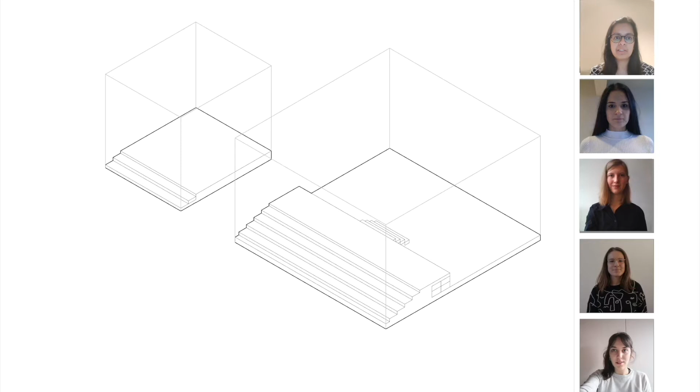Two prototypes of two different sizes are characterized by an elevated floor, a plinth. Several steps extend the interior space to the outside by creating sitting areas in dialogue with the exterior public space.

Flexible furniture is integrated in the room, such as pull-out seating stored under the plinth with the capacity to accommodate up to 70 people. Furthermore, on the back wall of the room, a flexible storage unit is located, and this is called the Tetris wall.

The wall is locked when the furniture is not in use, and it allows for a free usage of the room while training programs are not running. The Tetris wall is conceived in order to allow the most flexible configuration possible. Once closed, the furniture only measures 60 centimeters deep and 5 meters long.

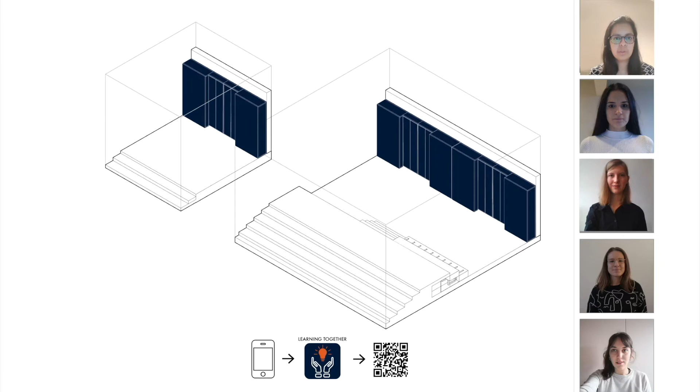Through an app on the phone, the QR code can be scanned to unlock the space. Charges will be registered for each minute of use, and in this way, the responsibility of the furniture is ensured by the users. Maintenance can be done quickly through the app by notification made by a user.

The wall furniture is composed of three parts. In the center are located two cabinets, the wet and technical one. They will provide hot and cold drinkable water, printer, projector, sockets, and other basic tools.

On each side of these two cabinets are located the sliding furniture. These are composed of a cabinet that can be pulled out and moved in the room to be used as a space divider, as well as a storage space or projector surface.

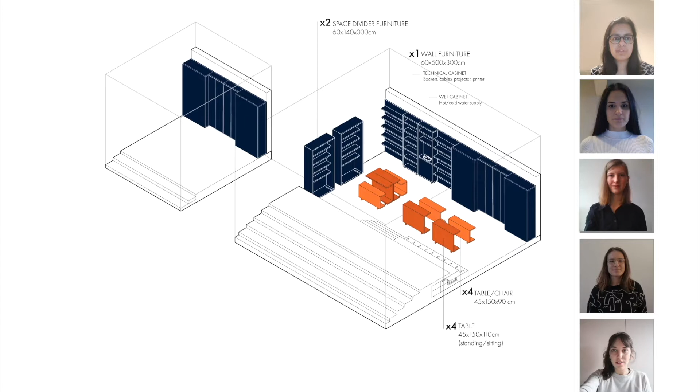Inside are interlocked four tables, 1.5 meters and 0.9 meters high. Used together, they form a complex of sitting and working structures. Turned on the side, they can also be used as sitting areas.

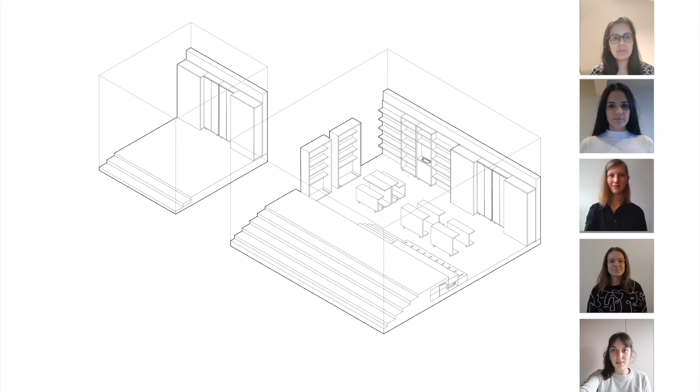An easy closing system for the space is ensured by a metallic curtain, similar to the commercial activities in the area. During the night, the space can be closed and locked, and during the day it can welcome community activities in parallel to the training center.

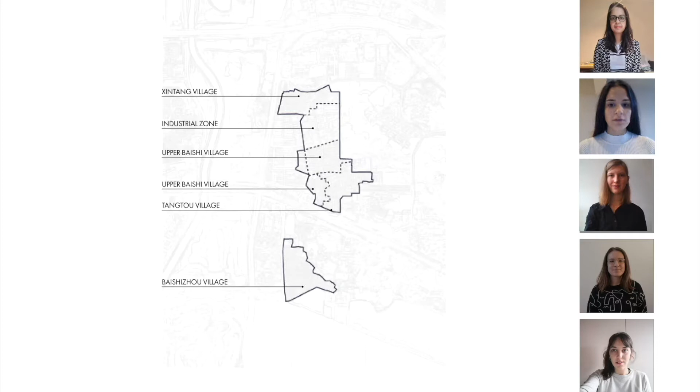Baishizhou urban village is one of the largest in Shenzhen. It's divided into 5 smaller urban villages. We have, on the north, Xintang village, the industrial zone, Upper Baishi village, Tangtou village, and on the south the Baishizhou urban village, which will be the focus of our analysis.

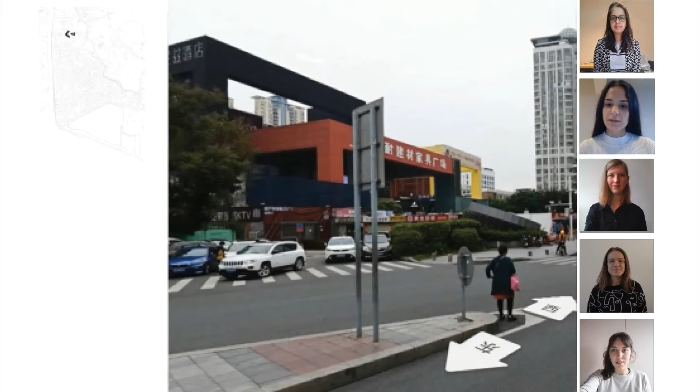It was important to understand the atmosphere and condition of the site, but also what was developed around it, such as the city with its characteristic skyscrapers, shopping centers, as well as the touristic attraction Windows of the World.

Furthermore, a more in-depth analysis was carried out through a mapping exercise in order to develop a more efficient and successful proposal. Commercial activities were mapped out, such as food and restaurants, shops, service shops, offices, and beauty salons.

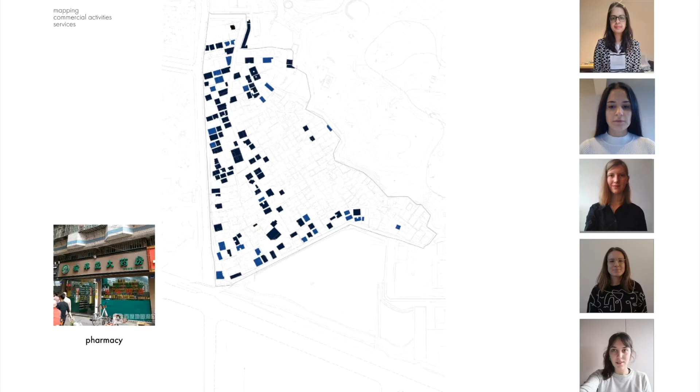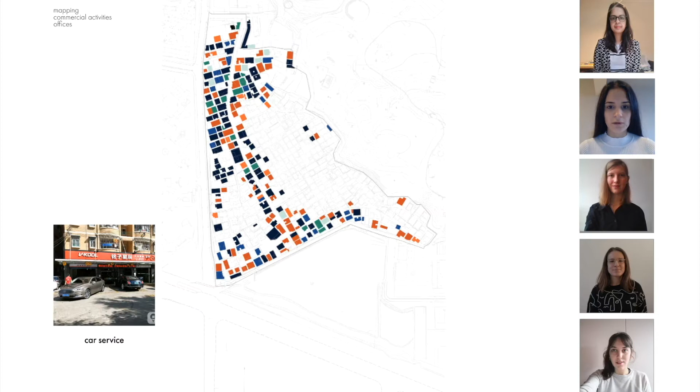From this map it was visible that commercial activities are mainly distributed and located along the main street on the north, center and south, while the east, which is mainly residential, is empty and has fewer commercial activities present. Furthermore, public facilities were also identified, and those, unlike the commercial activities, are not so present.

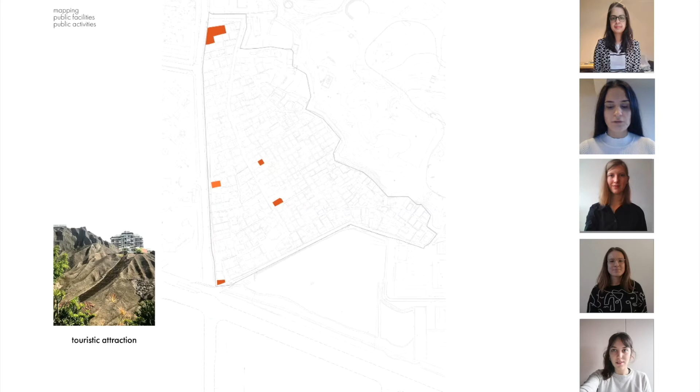There are only a few scattered alongside the site, such as a health center, one educational construction, or service centers.

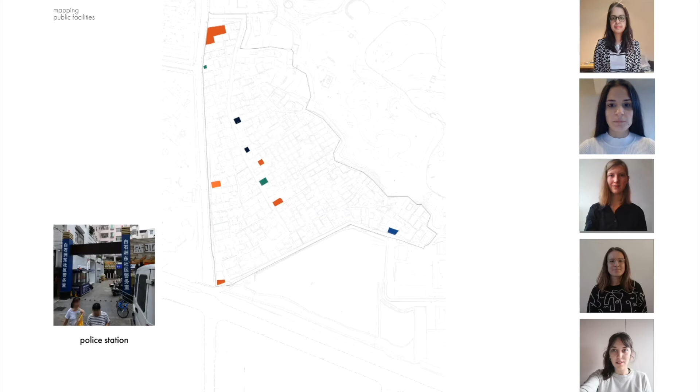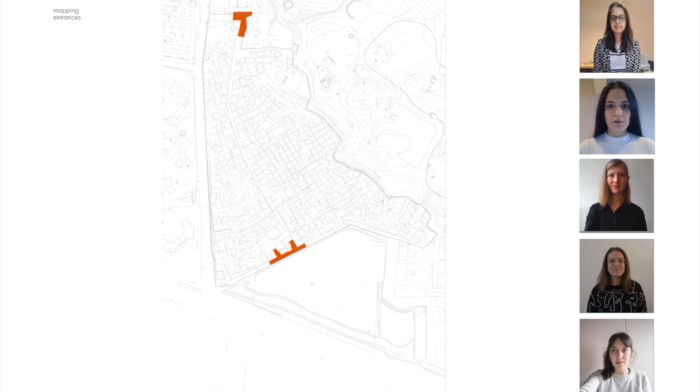The Baishizhou urban village is very highly dense, hence the circulation network was important to identify, both the primary and secondary network. Furthermore, entrances to the village were mapped on the north and south, as well as on the west. On the east, instead, it's closed, as it separates the urban village from the touristic attraction Windows of the World.

Furthermore, the main intersections of the site were mapped out, and this was fundamental to understand the focal point of the urban village of Baishizhou.

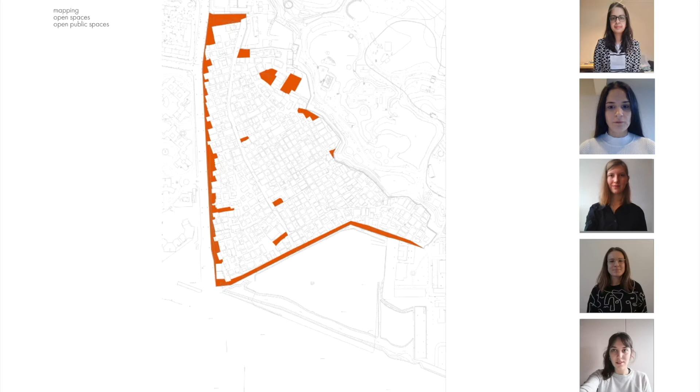The public spaces were also mapped, open public spaces around the site and pocket spaces in between the constructions. Furthermore, a space syntax analysis was developed.

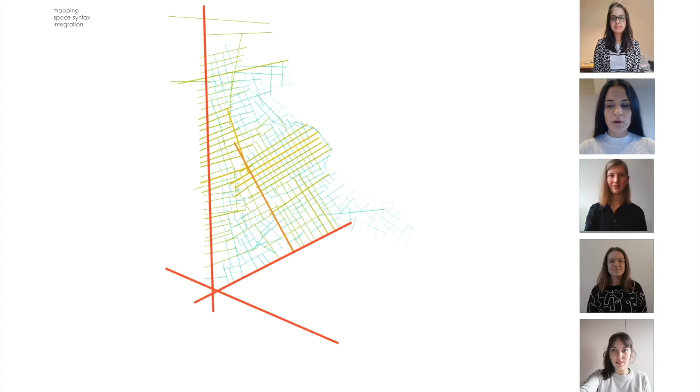The project aims at emulating the concept from vernacular Chinese architecture, especially the courtyard house, which creates a safe and harmonious environment independent from the exterior.

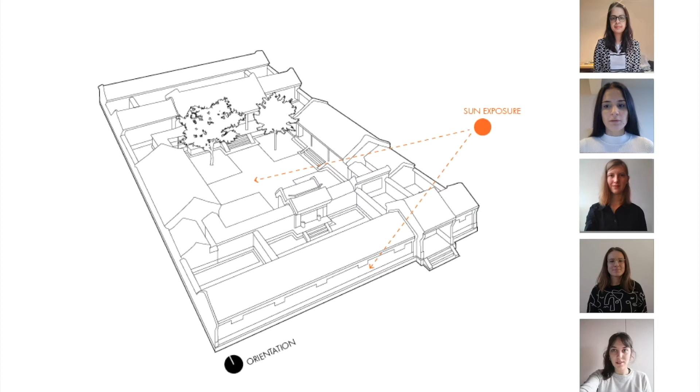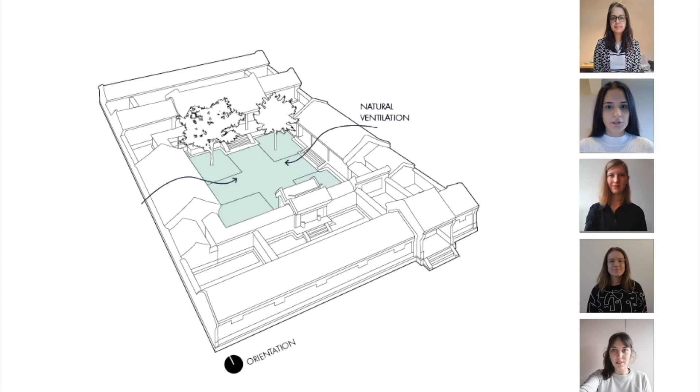Three are the main concepts from vernacular Chinese architecture that inspire the spatial configuration of the proposal. Starting with climate, where the elements are located in order to protect inhabitants from sun exposure, protection from the north wind, creating natural ventilation, but also providing a barrier from dust and noise pollution. Hence, those are the elements that characterize the concept of climate.

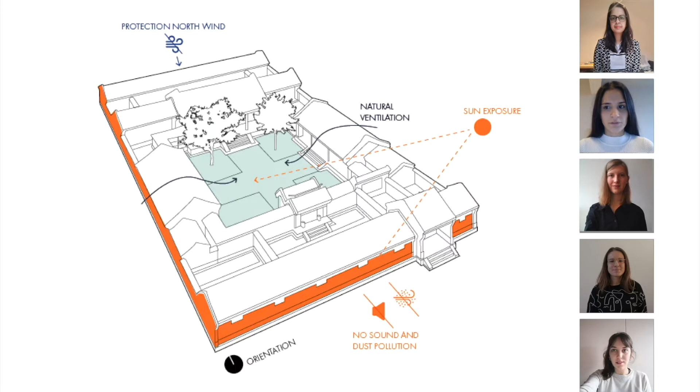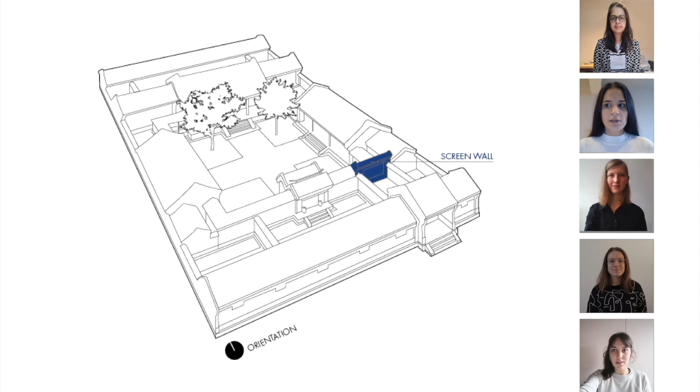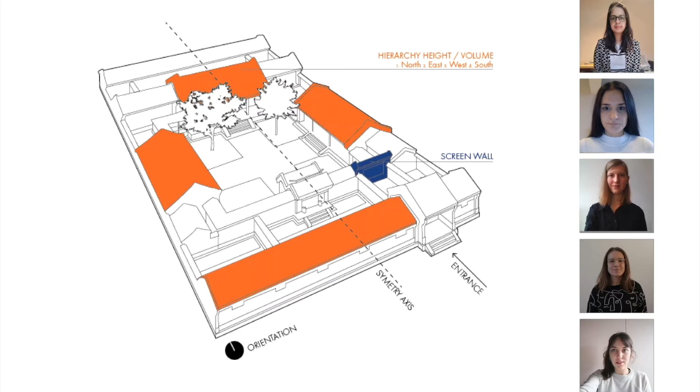Then, following the second perspective, is the architectural translation of Confucianism, where symmetry and the main axis assume a very important aspect. The entrance is located in opposition to the main building and is provided with a screen wall to protect the views from outside towards the main private courtyard. The hierarchy is highlighted by the position of the buildings as well as their volumes. That's the second point of Confucianism.

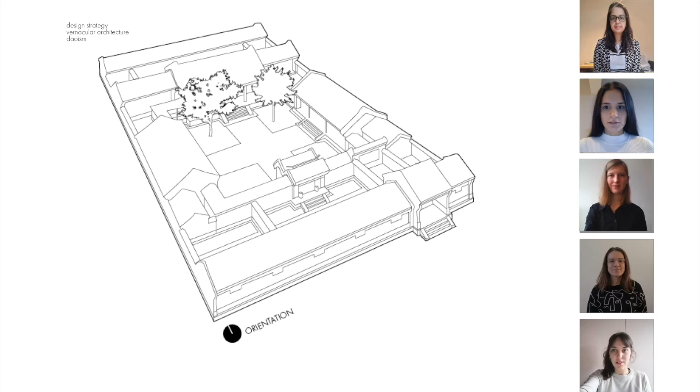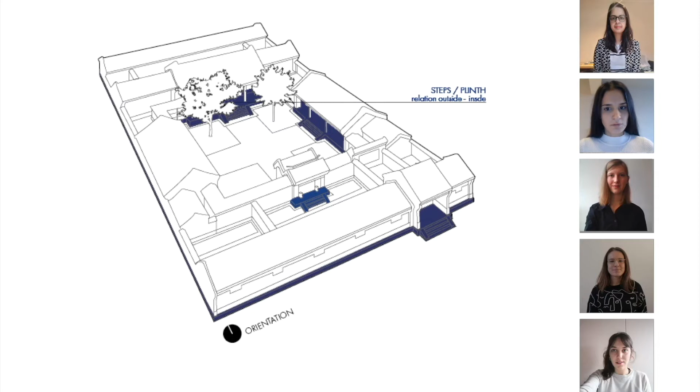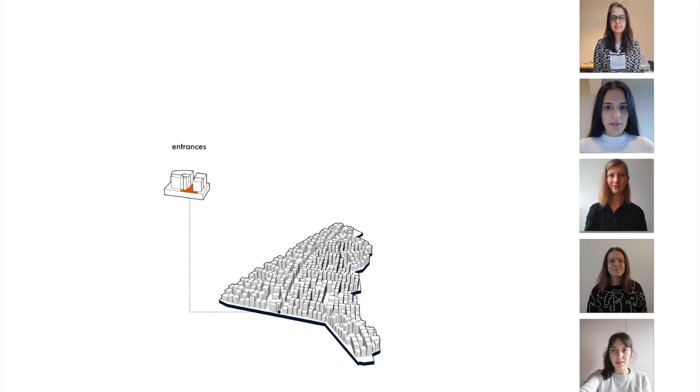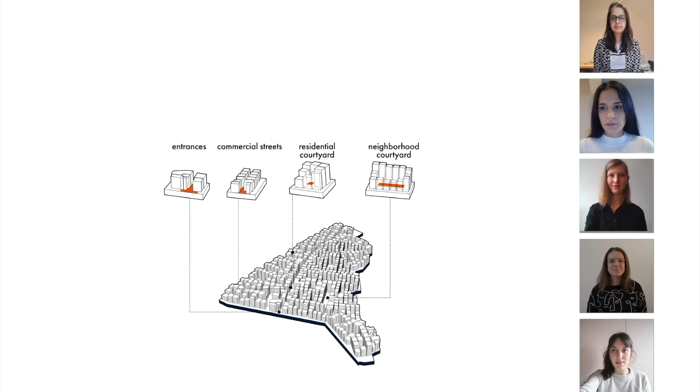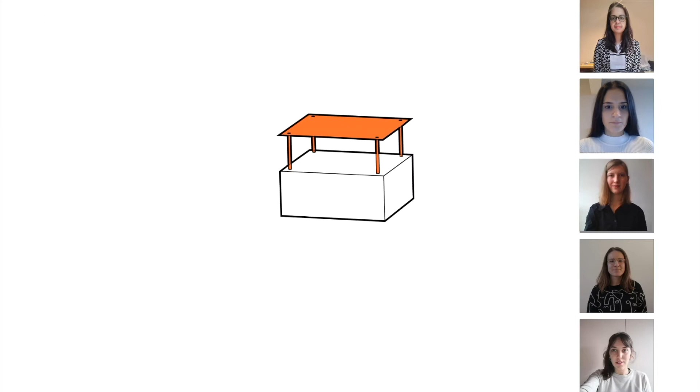Following our interventions, which act on 4 different scales, starting from the master plan and how the urban village is planned. Then we zoom into the public street level, redeveloping street typology and ground level public spaces such as courtyards, to then zoom into the built environment of the building blocks and residential units. The last scale is the roof level, where we create a water-catching strategy and bamboo structure to elevate the dimension of public spaces.

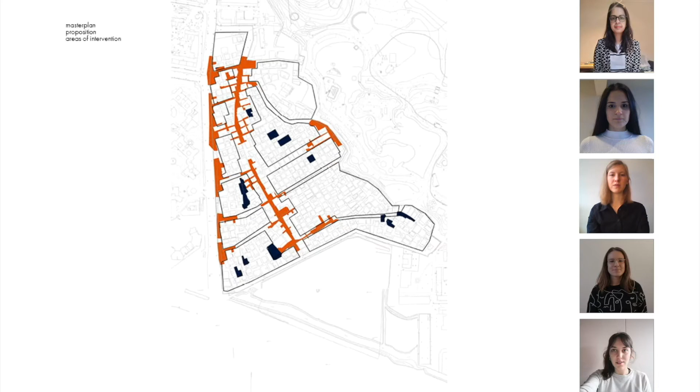Explaining our master plan, we highlighted the most important elements from our site analysis conclusions. On this map we can see the commercial streets, the intersections, and the entrances. In dark blue are the public spaces, the pocket spaces we identified as already existing in the village. Afterwards, we highlighted the different areas from our space syntax analysis that were less integrated, which we called the different neighborhoods we wanted to incorporate into our design.

The overall strategy for our master plan is to preserve the identity and characteristics of the site for its richness and diversity, and also to upgrade it and bring a better quality of life.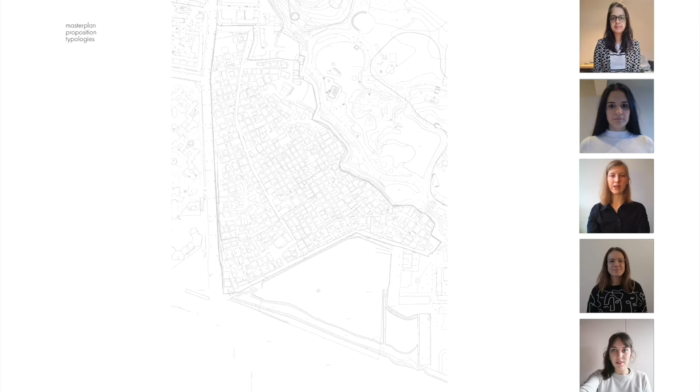For that, we wanted to highlight and preserve the commercial street as it's functioning very well today, and extend it to the perpendicular streets, which we saw in the space syntax analysis were also well integrated. Then we wanted to work on the entrances and main intersections.

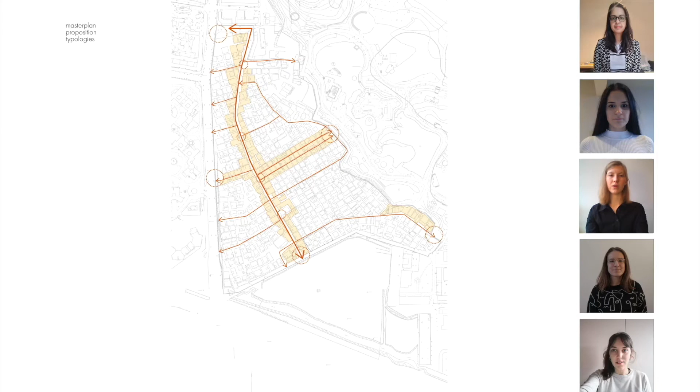Around that, we will apply our courtyard typologies. We will have two: the first, in dark blue, are the central courtyards, and in light blue are the residential courtyards. This gives us four typologies of public spaces, which we are going to explain one by one.

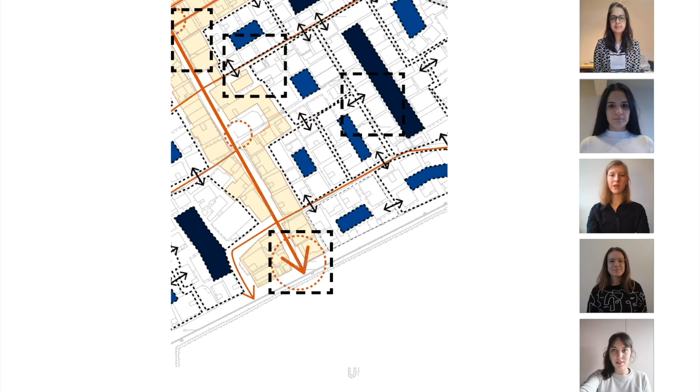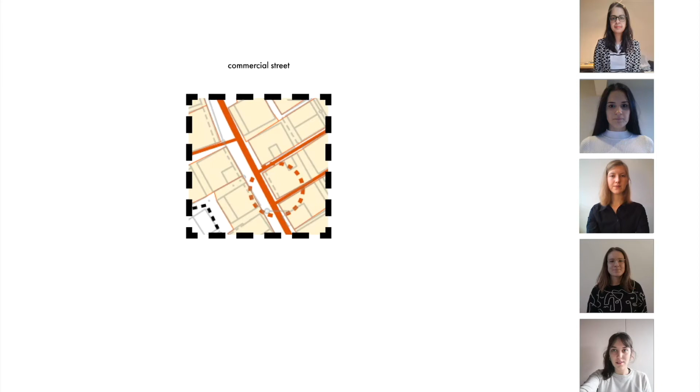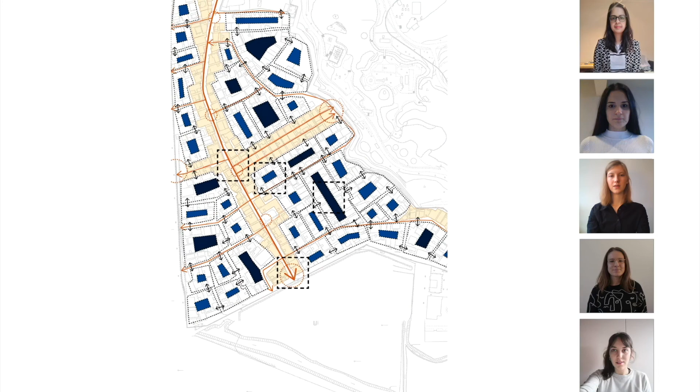The first typology is entrances and intersections. The second is the inner commercial streets. The third are the central neighborhood courtyards. And the fourth are the residential courtyards.

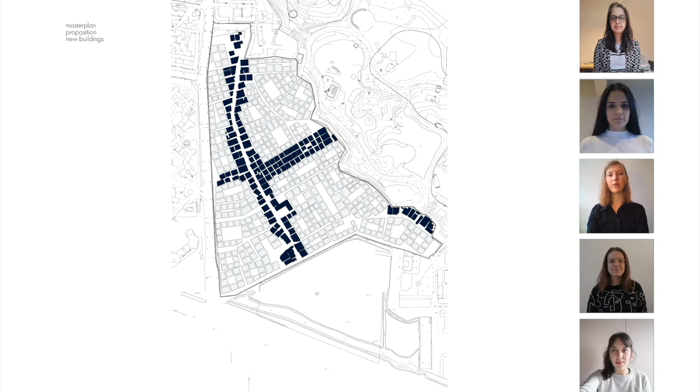Around the courtyards, we can increase the density with the new prototype that we're going to present later in the presentation. We then reflected on the different building heights for the master plan, looking into the vernacular architecture of the courtyard typologies.

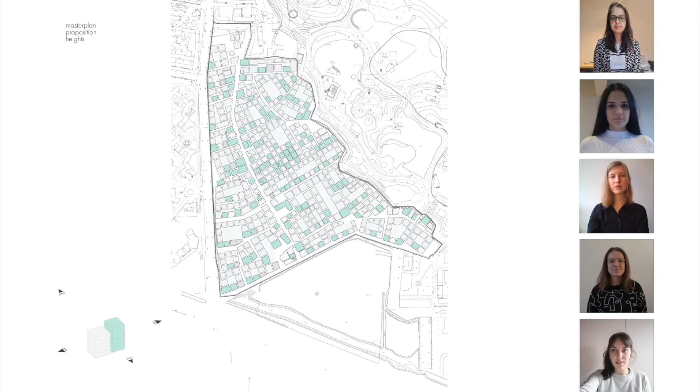We wanted to work with lower buildings towards the south, originally related to the entrances and the servants' quarters. The buildings rise up towards the west, where the sons used to live, and towards the east they become bigger in importance and height, where the heir lived. Finally, it rises up to the north, where the owner of the family courtyard used to live.

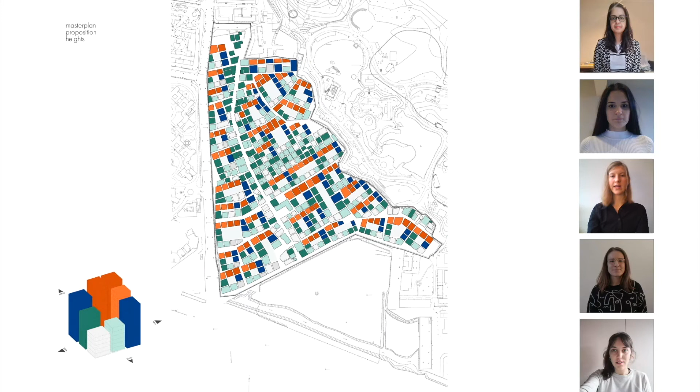In that way, we wanted to preserve the connection to the past and bring dynamism through the different heights of the buildings in the village, which also serves our climate strategy.

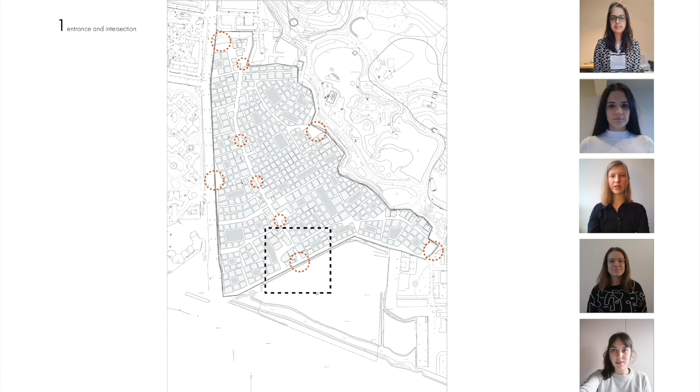The typology we're going to explain now is the entrances and intersections. Zooming into one, we first analyzed the existing situation with the facades and the different proportions of the commercial activities, how they occupy the spaces, and how they appropriate the external spaces.

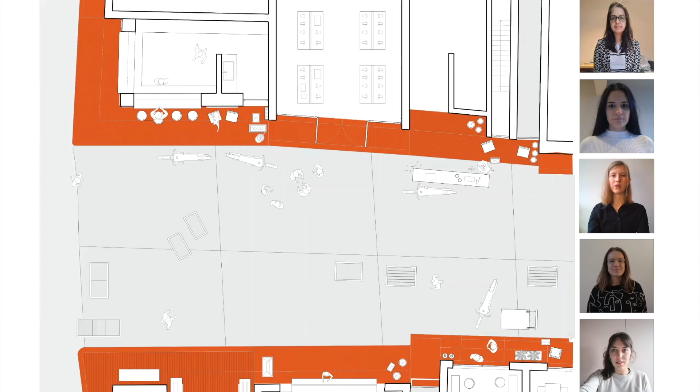For that, we looked at the streets and plans with the different pavements that originally existed and how they were occupied.

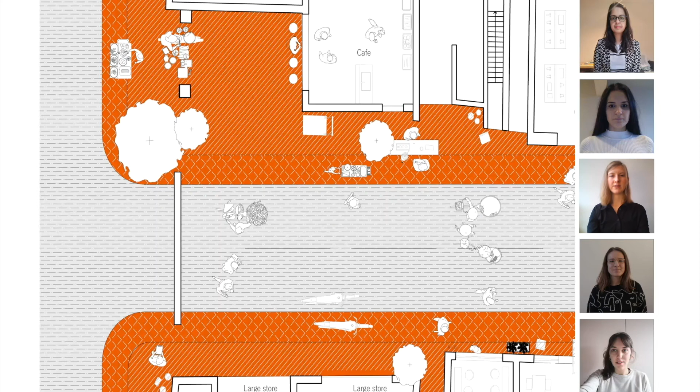We wanted to work with a link to the past, the vernacular architecture, for a sense of hierarchy by using materiality to differentiate the different levels of openness from the inner streets towards the shops. We can see that the shops can extend onto the street until a certain point, characterized by a certain material and height.

The rest of the street is divided into different materialities, but the overall height stays the same, so the streets can be used and reconverted for special occasions, such as festivals or traditional moments, at the most important parts of the area, the intersection nodes and the entrances.

Here we can see a glimpse of the atmospheric view of the streets.

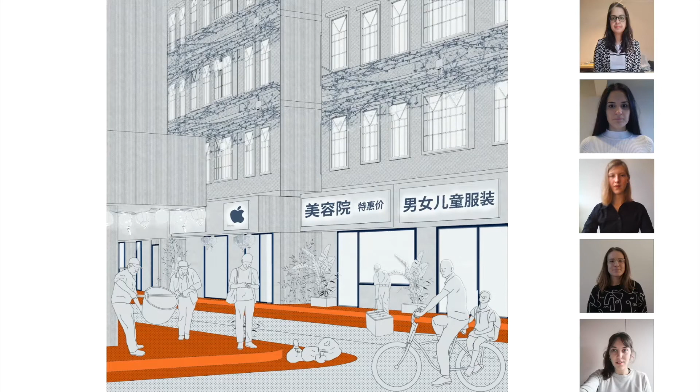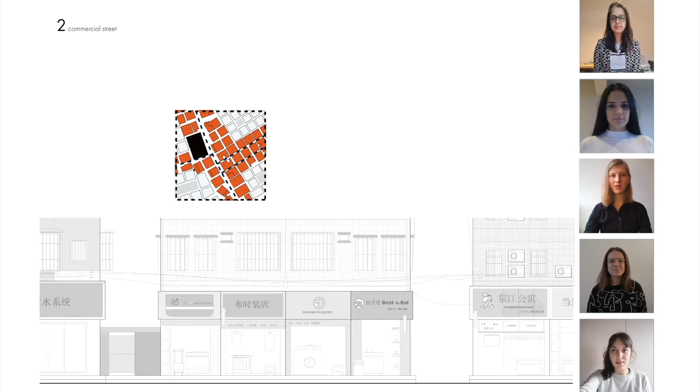The second public space typology is the inner commercial streets. We also analyzed the existing situation in the built fabric, looking at the different proportions of commercial activities and how they extended and used the public spaces of the streets.

We noticed that the public spaces are more used, and the different presence of steps is used for seating areas, gathering, and hierarchy in the street.

We wanted to increase them by applying a more fluid line inside the street, while also working with different materialities to emphasize them.

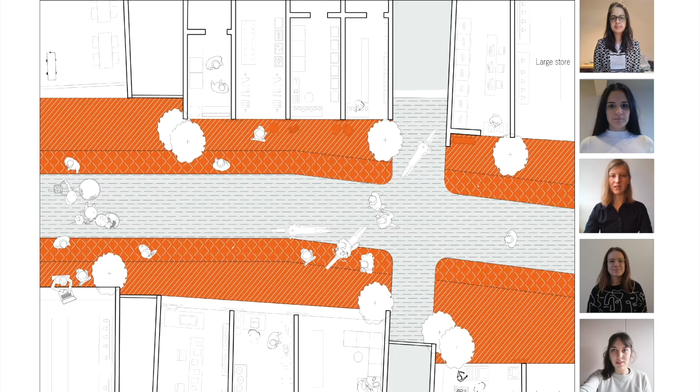So we would have the first platform of the shop that can extend to a certain point, then different steps, and then the central element, which is wide enough to welcome cars, little trucks, and the different bike carriers.

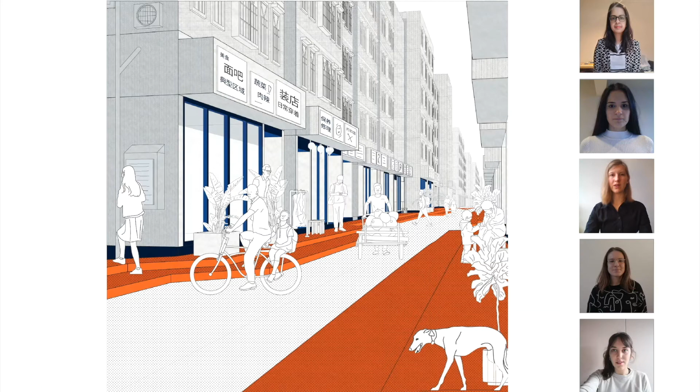Here is another glimpse of the atmospheric view of the inner commercial streets.

So we are now going to present the spatial typology of the residential courtyard. We wanted to work with a typology of 9 buildings, and then remove the central one in order to bring vegetation and greenery inside the courtyard.

Here is the ground floor of the courtyard typology, with symmetry and axial organization of the plan, but also for the entrances, the presence of the screen wall.

The entrance is marked by covered space, which is in relation to the main street, and then protected by the screen wall, which is only 1.50 meters high, in order to protect the interior from view, but also to allow someone passing to catch a glimpse above it and a little intrigue of the atmosphere inside the courtyard. On the opposite side of the entrance, we have the entrance to the core to access the different apartments on the upper level, which we'll explain in the following chapter.

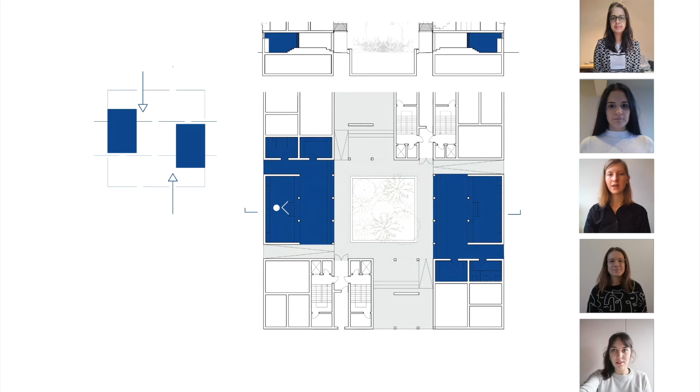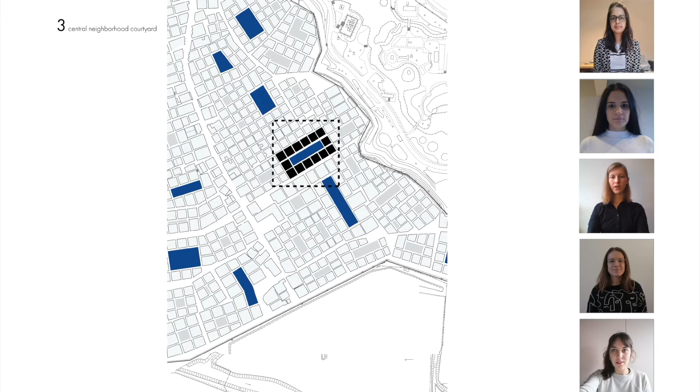Then we're going to look into the central courtyard typology. Each area marked as less integrated in the village will receive this bigger, large-scale courtyard in order to receive more dynamic activities. The inner buildings are replaced by a large greenery area, with a paved area on both sides that can welcome dynamic activities such as dance, sport, tai chi, or social gathering.

The plan is based on axial symmetrical organization, so entrances are marked on both sides in south and north by a plinth, which can host street foods or commercial activities, and on the other side, commercial spaces. On the opposite side of the entrances are located the cores to access the upper apartments. The overall floor level of the ground floor is at the same height as the streets around it to emphasize its welcomeness and accessibility.

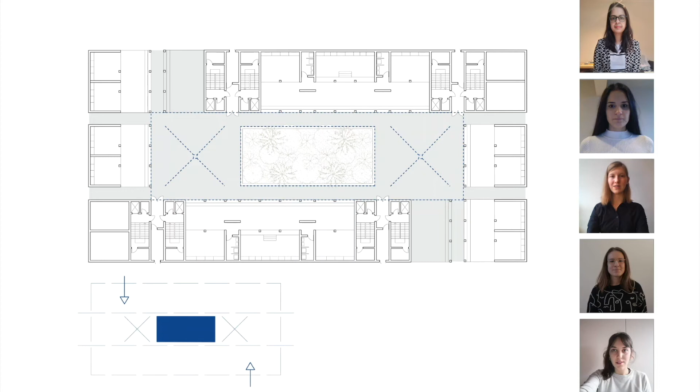Buildings are connected into blocks around the courtyard. The connection is made by external corridors enabling circulation. Where required, secondary corridors can be added.

The prefabricated core structure allows for variable floor planning, except for clearly defined communication cores.

Block principle allows for several transformation strategies. Firstly, the ground floor serves commercial and communal purposes. Second, buildings' mutual integration is ensured by external corridors. Further, the green network returns to the neighborhood.

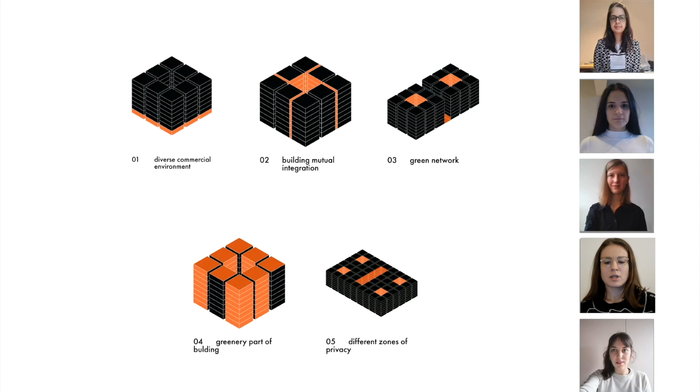Great emphasis was placed on rethinking housing units, thanks to the perception of urgency for improving current living conditions. The ground floor mainly accommodates a vocational training center and local businesses.

The typical floor allows variable placement of different types of apartment units. Based on need, it is possible to subjectively place additional community spaces.

With the aim to accommodate families and co-housing groups of varying sizes and needs, 3 basic units were examined. Firstly, a family apartment with a fundamental model of 3 by 9 meters was examined to accommodate a family of 4. Another type examined is a tiny apartment, with a very minimal area of 13 square meters, designed for 1 or maximum 2 people.

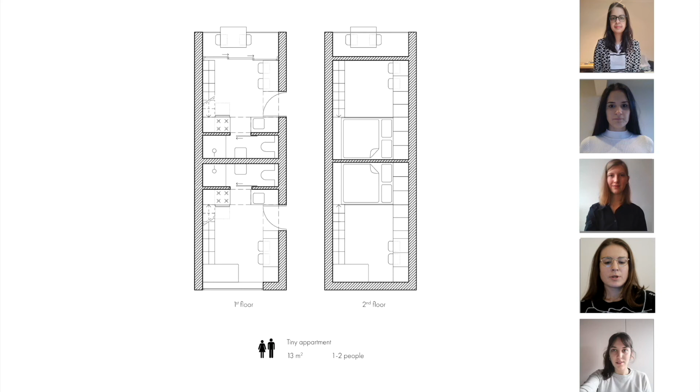The third type of designed apartment is a shared unit, with an area of 58 square meters. With smart design, it is possible to comfortably accommodate up to 8 people. Emphasis was made on privacy while sharing a facility with strangers.

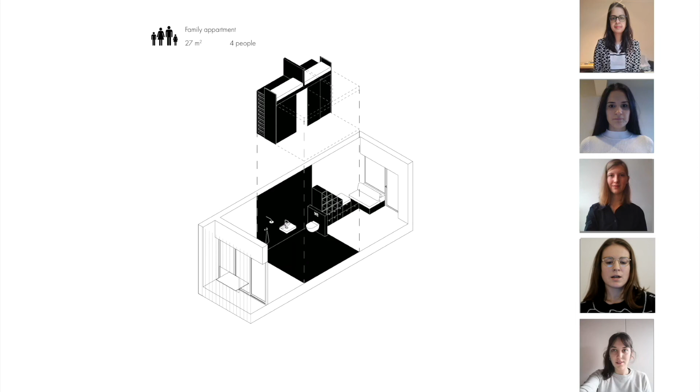Longitudinal orientation brings not only enough light but serves as a natural ventilation system. All units are designed as duplex apartments, ergonomically minimal but efficient.

The typical floor layout is formed by a connection of 9 neighboring buildings via external corridors, which allows us to eliminate communication cores inside the building and provide more living space. Within each block, several flats can be omitted, and this free space will serve for community purposes.

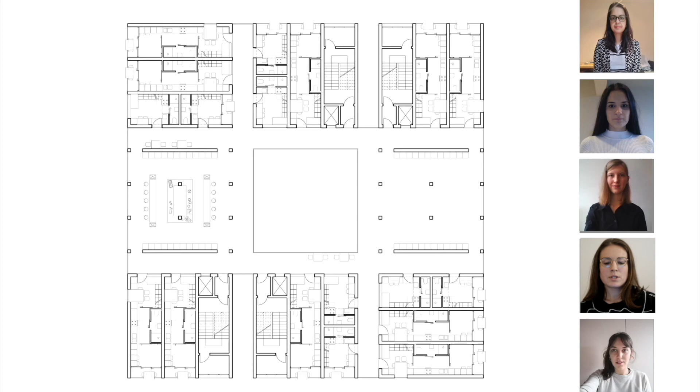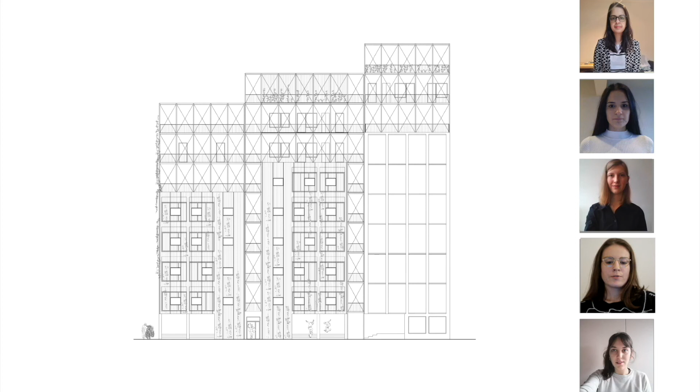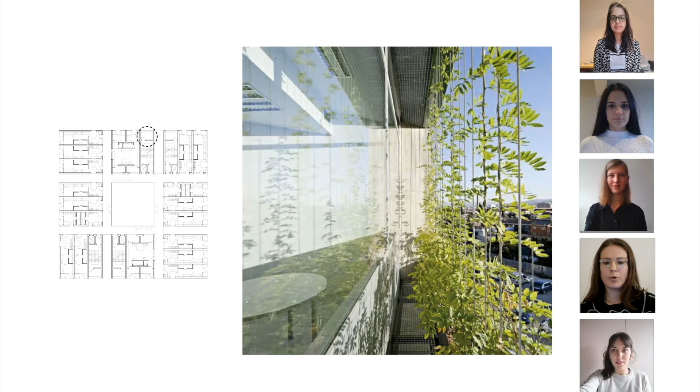The use of modularity is obvious; repetition allows for a better quality of living with lower prices. Except for renovation of inner spaces, the facade treatment was designed to raise the village environment. Green facade elements increase the living conditions of local inhabitants by improving air quality, thermal comfort, and noise absorption. Facade types are chosen based on the street character or interior program. By following natural principles and modern technologies, four different types of facades were designed to improve indoor and outdoor microclimate.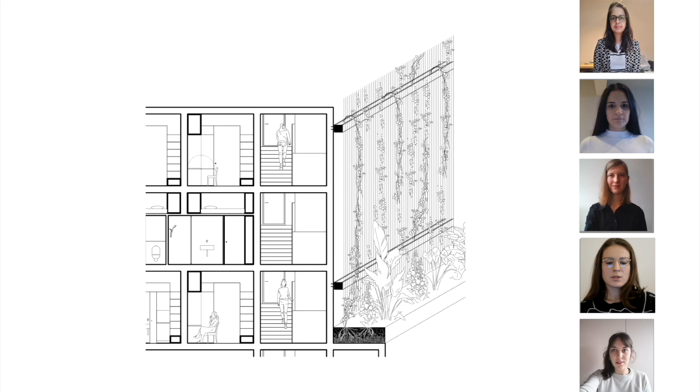The first type, the light steel structure corridor, serves as communication but also as an extension of the units. The second type are green balconies, serving as a pot for the facade greenery. The third type is water-catching fabric used as a shading system. Finally, facades without windows allow for planting wild intensive greenery.

Water-catching roofscapes: the design of rooftops takes into account the meteorological conditions. Shenzhen is characterized by a hot and humid climate. The project tries to activate the underused space at the rooftops in the densely populated city, first by capturing water and guiding it to a collector so it can be reused for various purposes. This will be done with a system of two textiles.

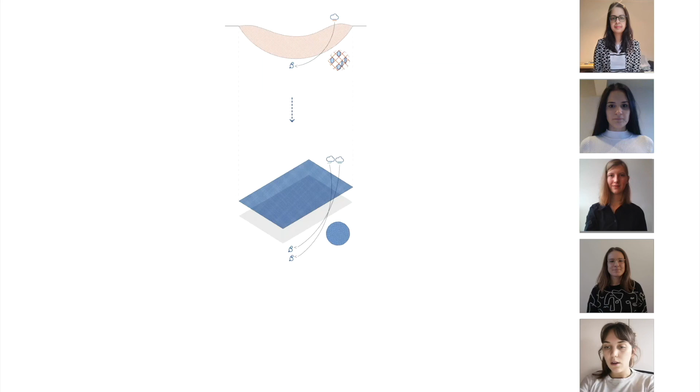The textile on top can harvest fog. The permeable mesh allows humid warm air to pass and captures the water droplets, which fall by gravity and are caught by the canopy. The canopy is an impermeable textile that works as a dew condenser and captures most of the rainwater. This dense textile also provides a pleasant shaded area. Both textiles could be made out of recycled plastic, a large waste material in Shenzhen, participating in our community idea.

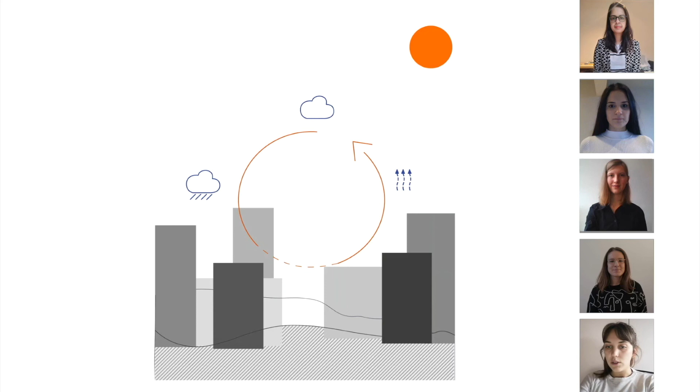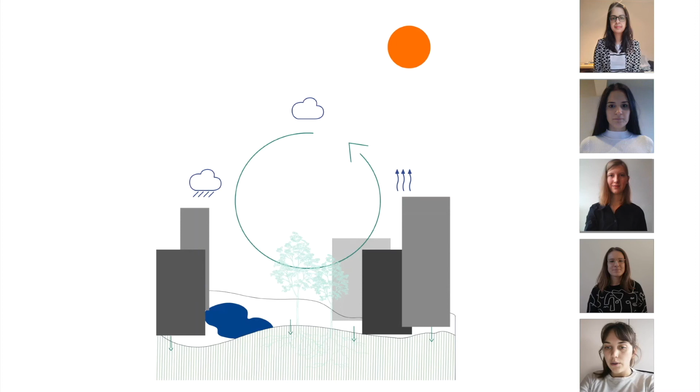Shenzhen also faces serious challenges regarding water, due to rapid urbanization, heavy rainfall, and major hardening of the substrate. China started to implement the sponge city concept, based on the idea of soaking up as much rainwater as possible so it can infiltrate the ground and become part of the water cycle again. The city is already struggling with floods, stormwater pollution, and drinking water shortage, problems that will rise in the near future if Shenzhen doesn't take action.

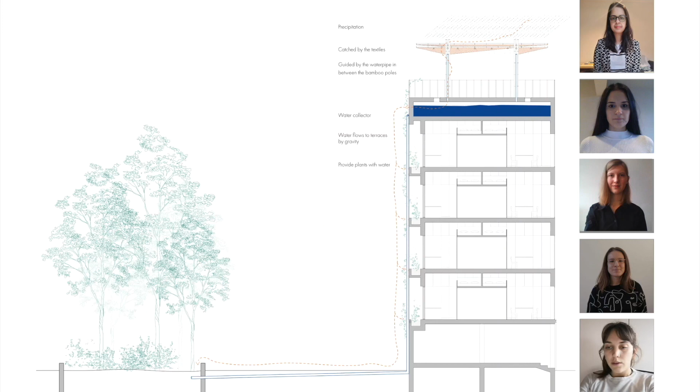Contrary to the battle Shenzhen faces, we focused on this topic in our design. The textile on top captures the water, guided by a pipe between the bamboo poles to the water collector. The water flows down by gravity to the greenery along the facade, and the water that is left can be used to irrigate the courtyard. After this process, the water infiltrates again into the subsoil and contributes again to the water cycle by evaporation. By activating this natural cycle and providing natural ventilation, we create a more livable environment for the inhabitants.

We can estimate how big the collector needs to be for the water — this will be the area of the roof uplifted by one meter. To make the rooftop more agreeable in summer, we can add a fogging system to cool down the place. The structure of the roofscape is made out of bamboo poles.

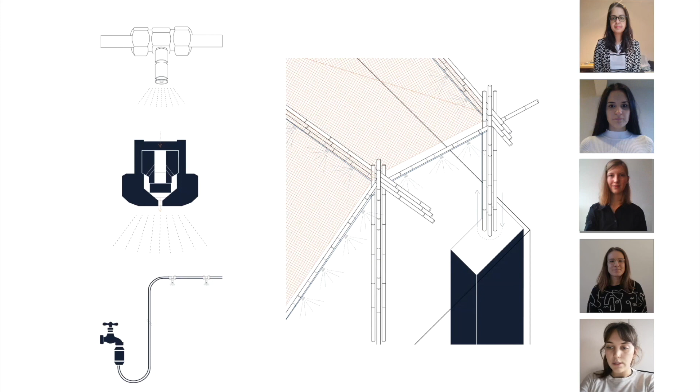Bamboo has a long history in Chinese culture. It is a natural, sustainable material that is cheap to use. The roofs will contain different structures, each defining a specific occupation.

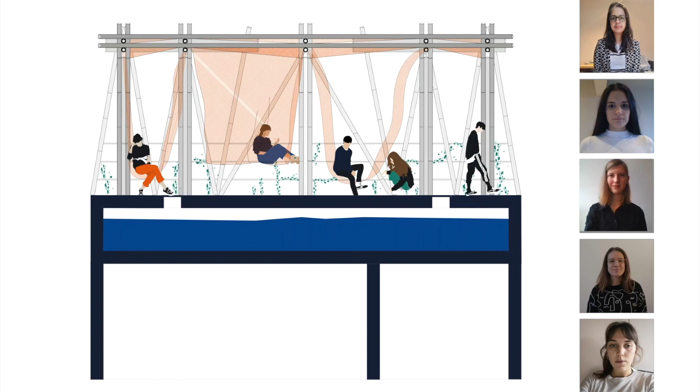This one is for leisure, a playground or relaxing area. This one is for sports, to do yoga, dance, volleyball, or basketball. This one is to gather, made with the flexible furniture also used in our community idea, to do theater, give classes, or play board games.

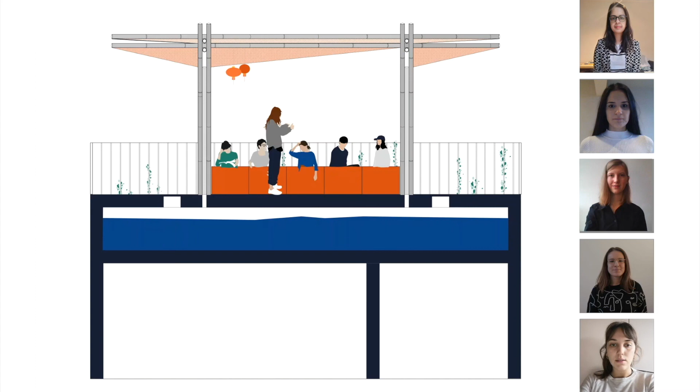The poles are connected with knotting, different kinds of knotting and lashing. To connect the textile with the bamboo poles, we use a rope, here a bowline knot.

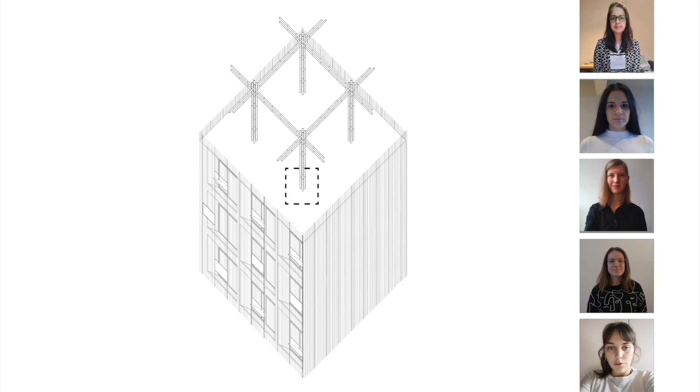For the foundation of the poles, the rainwater pole is embedded in concrete, and the bamboo poles are connected with bolts so they can be easily repaired. This part is made with a 3D printer, connecting the textile with the water pipe without losing too much water. This is the final image where all the details come together, showing the foundation, the textile, and the knotting.

We conclude by reinstating the intention behind the project: to achieve circularity and balance between the different actors involved. The approach has been manifold — economically, socially, spatially, and climatically. We tackle the various scales differently to achieve a diverse range of impact. Thank you for listening.